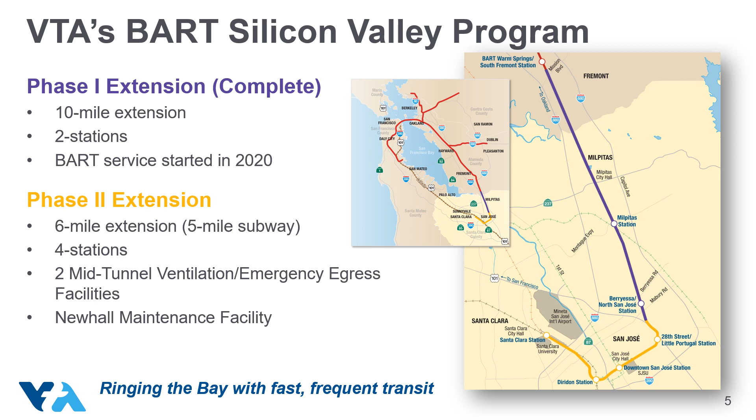The Phase 2 project provides several benefits for the region. A primary benefit is this project will connect the counties of San Francisco, San Mateo, Alameda, Contra Costa, and Santa Clara with improved, seamless, and frequent rail service around the bay. This project will also connect to many regional transit services, including VTA Light Rail and Bus, Caltrain, and other commuter and intercity rail services, including future high-speed rail.

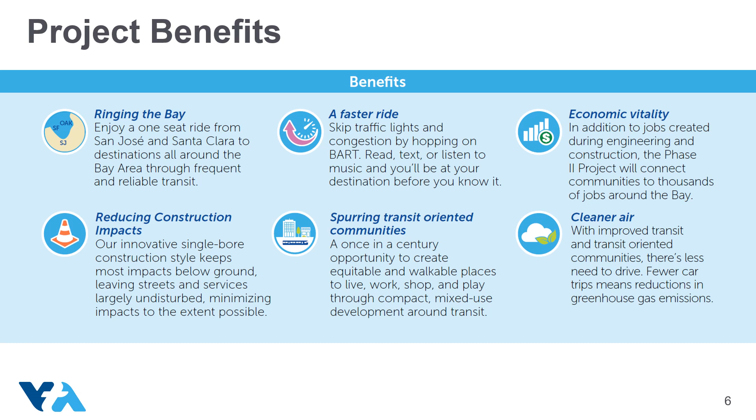We anticipate most future BART riders will access the system through transit, bicycle, or walking. By providing community members healthier and greener transportation choices, VTA's future BART stations will spur the growth of transit-oriented communities. The project will also result in cleaner air and reduced greenhouse gas emissions. All this means more economic growth that is more sustainable and will strengthen Santa Clara County's position and influence in the region for decades to come.

VTA and BART have been working closely together to get to where we are today. Santa Clara County is not part of the BART district, which is why VTA and BART have a unique relationship critical to delivering this project, and each agency's role is outlined in the comprehensive agreement. VTA covers all costs associated with the construction, operation, and maintenance of VTA's BART Silicon Valley program. It also oversees contracting and procurement for the project, including construction. Once constructed, VTA will retain ownership of all infrastructure.

BART is providing technical assistance during the planning, design, and construction of the project. This is being done through an integrated VTA and BART team called the Rail and System Organization. Once constructed, BART will operate and maintain the system. BART will also determine service frequency and operating hours.

VTA's BART Silicon Valley program began in 2000 when 70% of Santa Clara County voters approved a 30-year half-cent sales tax to fund transportation projects. The next year, VTA conducted a major investment study which determined the current BART extension alignment as the best transit project alternative. The VTA Board of Directors adopted the general alignment and station locations with the 2004 Environmental Impact Report. In 2009, the program was split into 2 projects, Phase 1 and Phase 2. Phase 1, which extended BART 10 miles from Warm Springs to Berryessa/North San Jose, advanced.

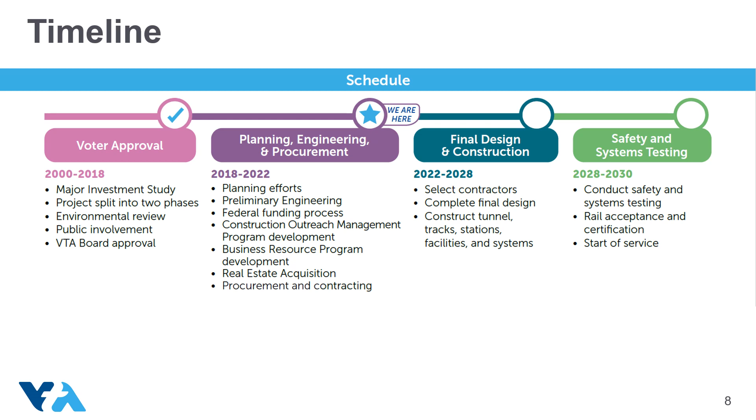VTA has a robust funding strategy that relies on significant local support, with 75% of the funding coming from local and state resources. The remaining funding would be granted by the Federal Transit Administration. VTA is pursuing a new federal grant program known as the Expedited Project Delivery Pilot Program, or EPD for short. The EPD program includes a requirement for public-private partnerships and limits federal funding to 25% of the total project cost.

VTA is the first agency to be accepted into the EPD pilot program, which will significantly shorten the process for receiving federal funding. In recent years, FTA pledged a total of $225 million towards project funding. VTA received a letter of intent for a full funding grant agreement, or FFGA, from the FTA on October 25, 2021. This action from FTA allows VTA to proceed with construction contracts, real estate acquisitions, final design and engineering, utility relocation, and other non-construction activities, such as procurement of commodities and other specialized equipment.

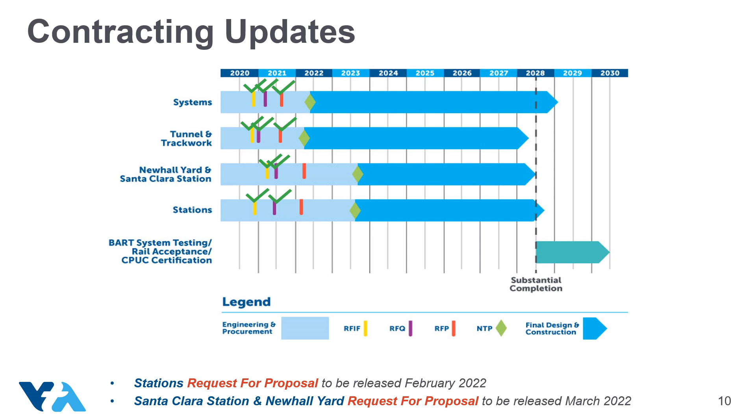The design and construction of the project will be delivered in 4 contracting packages: systems, tunnel and track work, Newhall Yard and Santa Clara Station, and the underground stations. All 4 contracting packages are going through engineering and procurement processes. Requests for proposals, RFPs, are underway for each of the contract packages. Contract Package 2, Tunnel and Track Work, is the largest of the 4 and first to be advanced. The RFP for the tunnel contract was released in September. Also, VTA recently released the draft RFP for Contract Package 1, Systems, earlier this year. We anticipate the remaining 2 contract package RFPs to be released in March and February of next year.

VTA's BART Silicon Valley Phase 2 project alignment extends south from the Berryessa North San Jose station and goes underground before crossing under US 101 and continuing west under Santa Clara Street. From there, the tunnel continues through downtown San Jose past Diridon Station and then turns north to align with the existing railroad corridor. The tunnel will surface just north of I-880, adjacent to Newhall Maintenance Facility. Tracks will continue at ground level until Brokaw Road in Santa Clara.

As previously mentioned, there are 4 stations: 28th Street in Little Portugal, downtown San Jose, Diridon, and the Santa Clara Station adjacent to the current Santa Clara Caltrain Station. The first 3 stations will be underground, while the Santa Clara Station will be at street level. The extension also includes the construction of 2 mid-tunnel facilities and a maintenance facility.

The concepts you're about to see on the following slides have been developed to inform final design. These concepts will be refined and finalized by the contractor in coordination with VTA and the cities of San Jose and Santa Clara. The upcoming slides also include images of conceptual finishes, such as wall and floor materials, that are being considered for each station. These designs and finishes were selected with the help of community-based design review committees for each station.

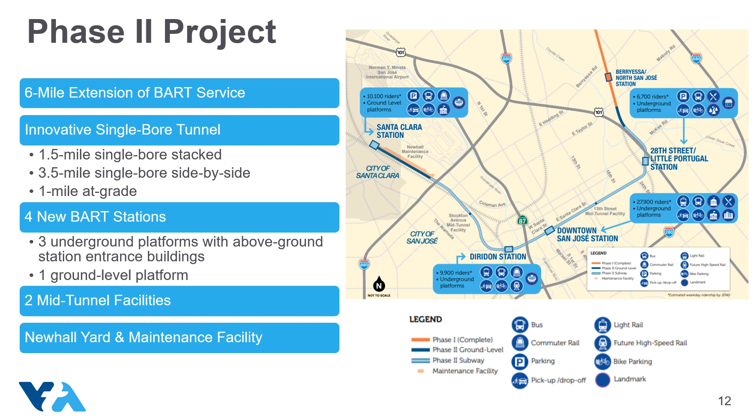Also included on the station site, but not called out by the concept, are an 800-space parking garage, a 400-space surface parking lot, and bicycle and bus facilities. The site is being designed to accommodate future potential transit-oriented development, or TOD. When TOD is developed, the 400 parking spaces in the surface lot will be incorporated into the TOD. The image on the right shows the various elements of the station from the station entrance building, item 1, down the stairs, escalators, and elevators, item 2, to the concourse, item 3, and finally the platforms below the concourse, item 4.

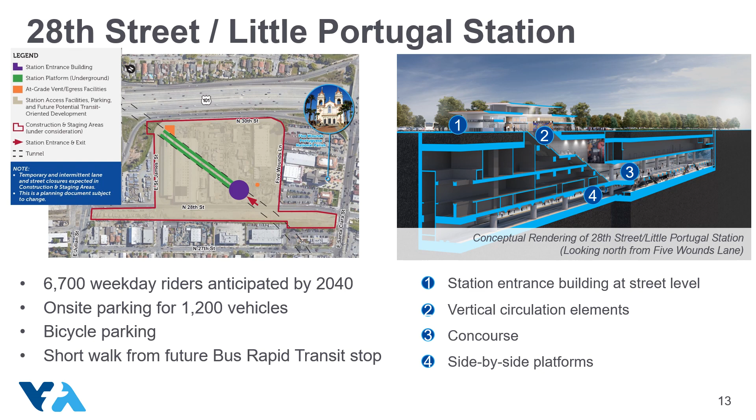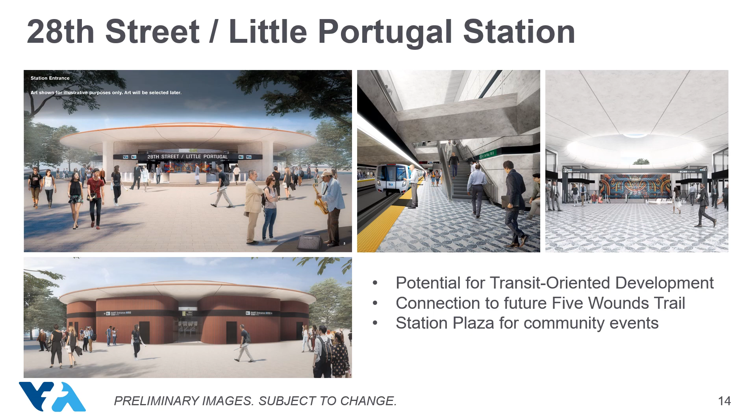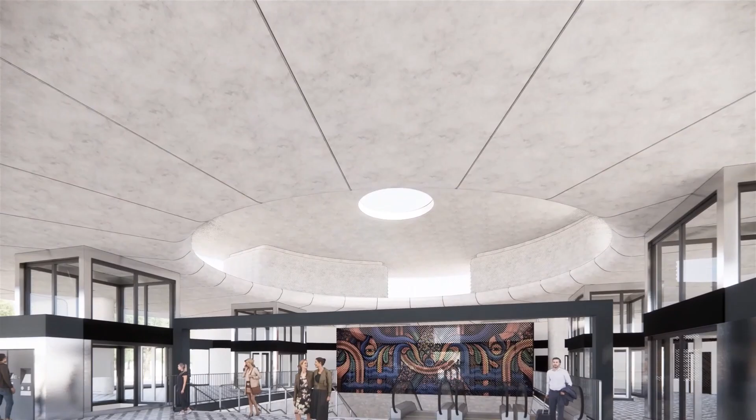This video showcases the station's current design and configuration and provides a conceptual representation of what a future rider might experience. This is the view of the station as you approach along 28th Street coming from Santa Clara Street. As you pass through the fare gates, your eyes are drawn to a circular canopy that lets light down into the lower parts of the station.

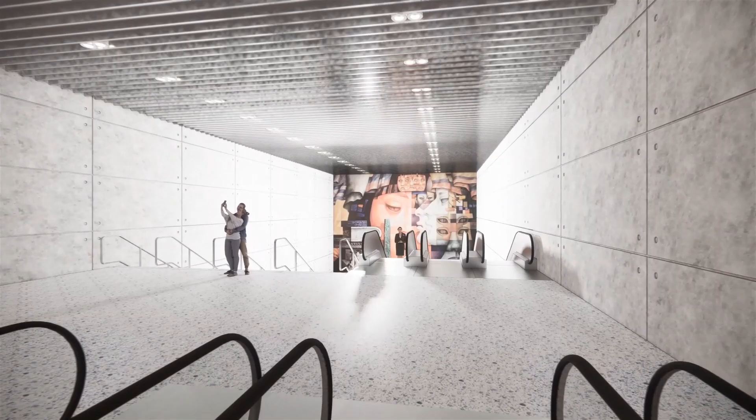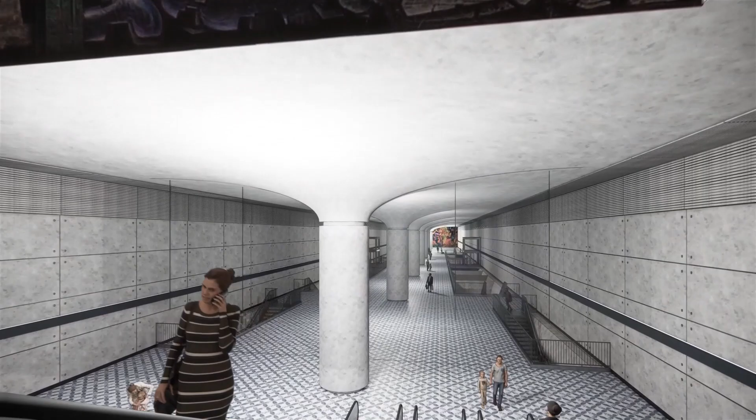Continuing down the escalators, there are opportunities for art installations in the future. Multiple locations are being considered for art installation. The escalators lead past a mezzanine and down to the concourse. From this level, you can access both the northbound and southbound platforms below.

From here, you can head west to Santa Clara in less than 10 minutes, or go north and beat the rush hour traffic and get to Oakland in approximately 65 to 70 minutes.

The next station on the alignment will be in downtown San Jose. This station will serve as the premier station in San Jose's central business district, with an anticipated ridership of nearly 30,000 passengers per day by the year 2040. The station will have two entrances along the north side of Santa Clara Street, as shown in purple on the conceptual site plan. The primary entrance will be between Market Street and First Street, where the current VTA Customer Service Center is. A second entrance will be constructed between First and Second Streets.

We have heard a desire for a future entrance on the south side of Santa Clara Street. While the south entrance is not part of this project, the project is accommodating for a future connection, which could be advanced as a separate project. Downtown San Jose Station will also include an emergency egress and ventilation structure on the corner of Santa Clara and 3rd Streets, represented in orange on the conceptual site plan.

Downtown San Jose Station's platforms, shown in green in the conceptual site plan, will be stacked one above the other. The station's internal configuration is shown in the conceptual rendering on the right. Fare gates would be provided at street level at each of the entrances. A mix of elevators, escalators, and stairs would provide access to the concourse levels. Short tunnels, also known as adits, will connect the concourse to the platforms.

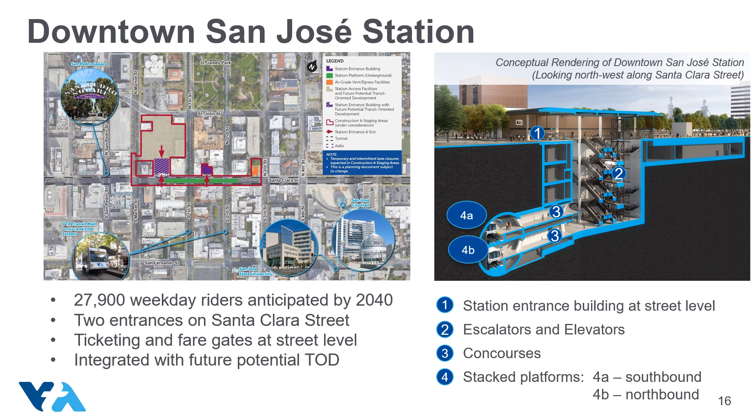VTA heard from the station's design review committee that Downtown San Jose Station should reflect the cultural and artistic diversity the area has to offer. The images on this slide showcase the aesthetic concepts that are being considered for the station. The station's exterior will likely be made of brick and may have a canopy over the entrance, an homage to the historic theaters of the area.

The station has significant opportunities for displaying public art, with murals envisioned to line the sidewalls of the primary station entrance. The station would also be integrated into future transit-oriented development on much of the block bound by Santa Clara, Market, St. John, and First Streets. VTA worked with the block's other property owners to develop a design development framework to guide a future developer, which was approved by VTA's Board of Directors in September 2021. In October 2021, the VTA Board approved the issuance of a two-step Master Developer Request for qualifications and proposals for the site.

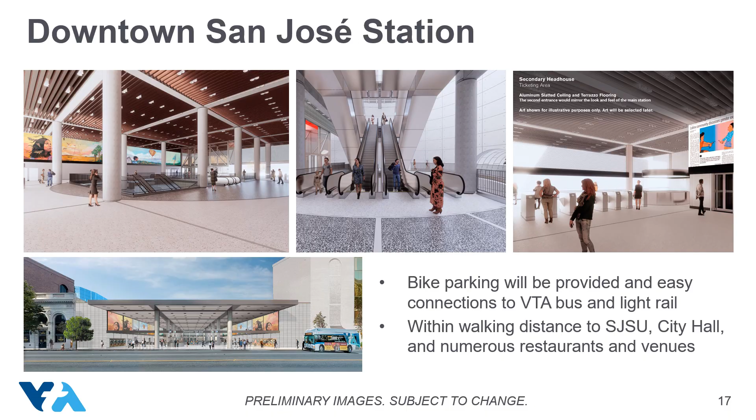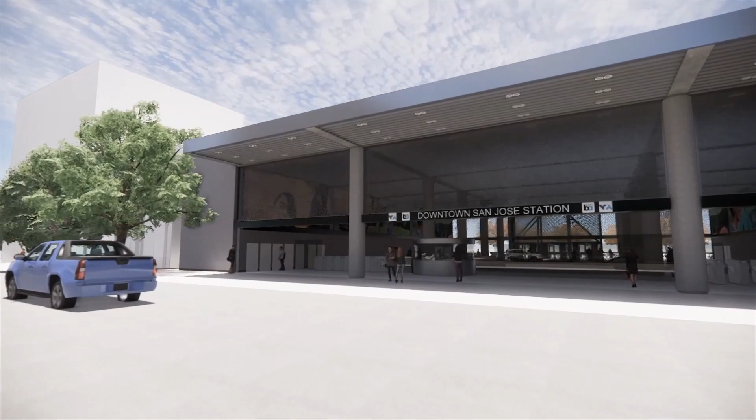On the next slide, we provided a video that offers a perspective of what you might experience when using Downtown San Jose BART Station. The video is intended as a conceptual representation of what a future rider might experience. As we approach the station's main entrance from Santa Clara, we see the station's canopy extending over the sidewalk, clearly indicating that you've reached the station entrance.

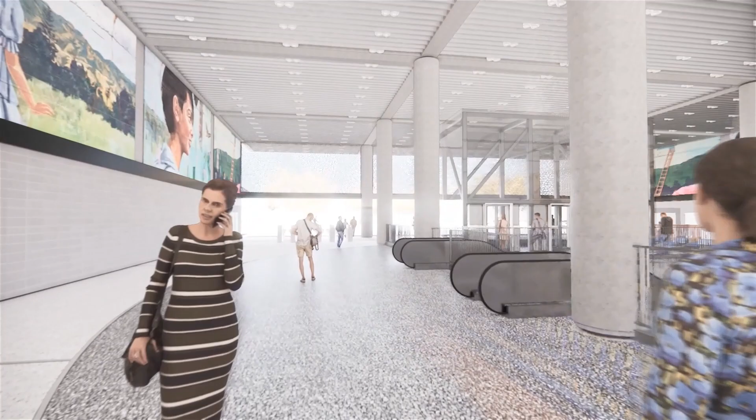Passing through the fare gates, you can see across the entire building to the entrance on the north. In the center are two sets of escalators and a bank of elevators. Let's take the escalators down. As we go down, we can see how the station's open design allows for natural light to penetrate down to the concourse level.

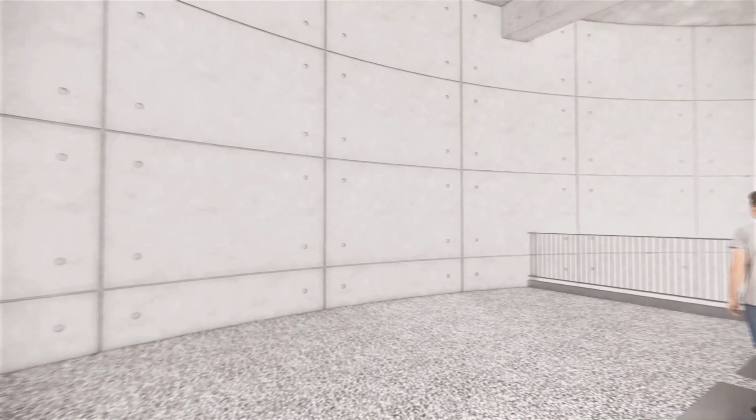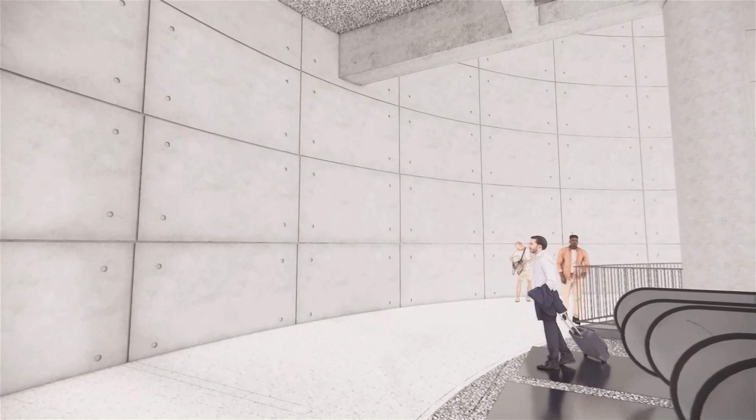The depth of the underground stations is comparable to the depth of the Central Subway Chinatown and Union Square Market Street stations in San Francisco. This first concourse level leads to the southbound train towards Santa Clara.

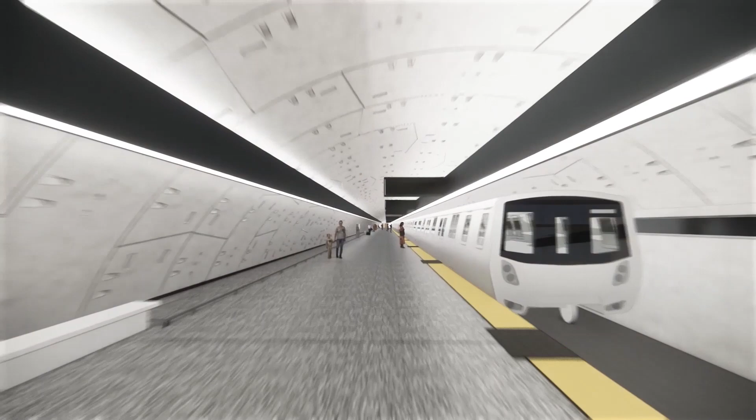As we travel down the platform, you can see the top of the tunnel. On the other end of the platform is the second station entrance. This smaller building will have high-speed elevators to bring us back to street level.

These fare gates are a 5-minute walk to City Hall and less than 10 minutes to the San Jose State University campus.

Continuing along the alignment, we next have Diridon Station, the primary intermodal hub of Santa Clara County. Diridon BART Station will be constructed on the south side of Santa Clara Street across from the SAP Center. The station's entrance will be located between Cahill and Montgomery Streets and will provide ground-level connections to VTA Light Rail, Caltrain, ACE, and Amtrak. This station is laid out similarly to the downtown San Jose Station, as shown in the conceptual rendering on the right.

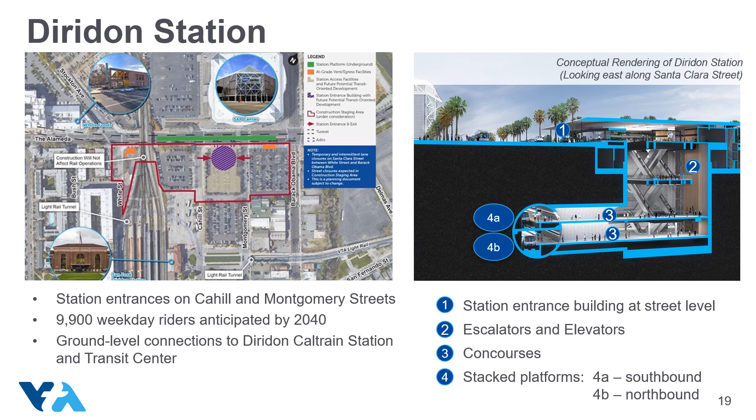Fare gates, ticketing, and bicycle facilities will be at street level. Future BART passengers would use a combination of escalators and elevators to access the concourses, and the stacked platforms will be under Santa Clara Street. The future Diridon Station is forecasted to serve nearly 10,000 daily BART riders by 2040.

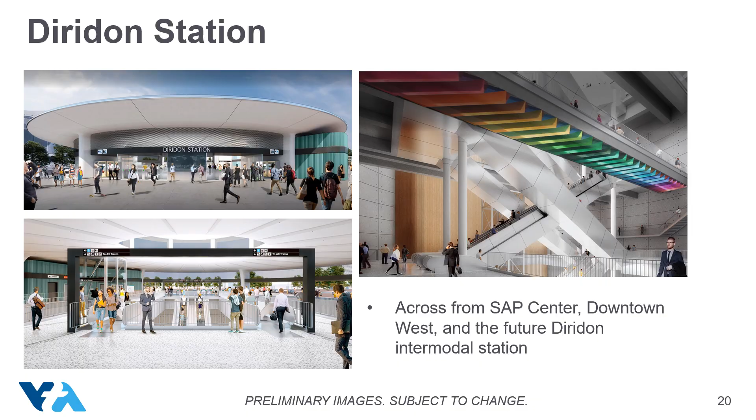The images on this slide provide representations of the aesthetic finishes being considered for this station. The station will face the SAP Center on Santa Clara Street, and entrances will be provided on both Cahill and Montgomery Streets. This open, light-filled entrance and accent colors bring a transparent and modern tech feel that is reflective of Silicon Valley. This brief video will provide a conceptual representation of what a future rider might experience.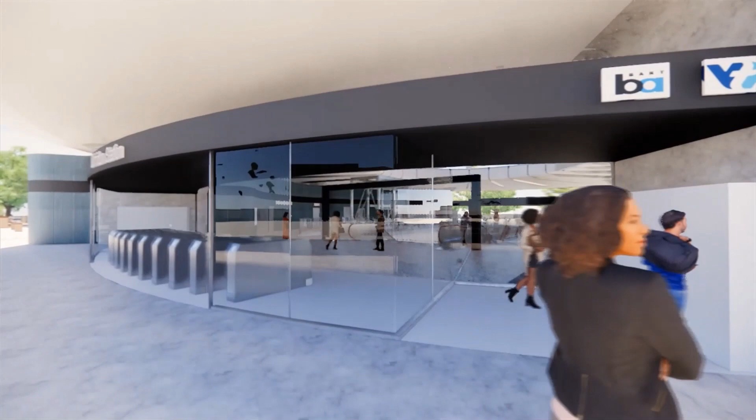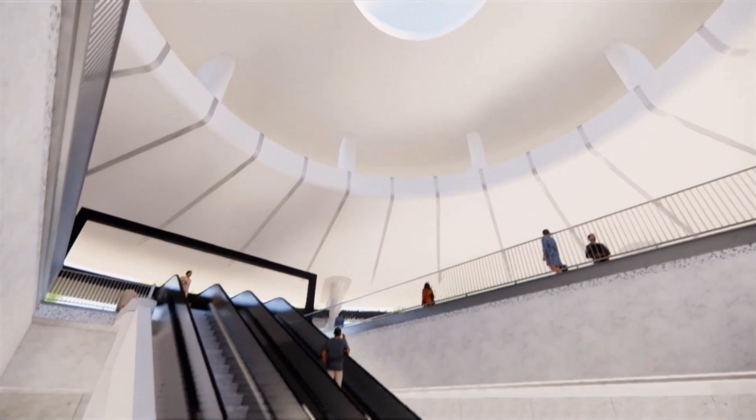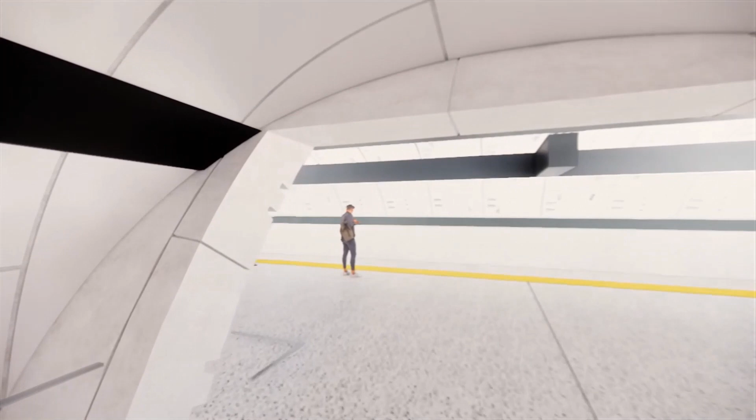Starting from across the SAP Center, we walk to the entrance on Montgomery Street. As we pass through the fare gates, you may notice similarities to the other two stations. Like downtown San Jose Station, this station offers stairs, escalators, and high-speed elevators. 2 flights of escalators will get us to the top concourse level. As we walk into the tunnel, you may notice that unlike at downtown, we are now at the center of the platform. The train from this top platform will take you to Santa Clara Station in less than 5 minutes.

The end-of-line station for the Phase 2 project is Santa Clara Station. This station will be adjacent to the Santa Clara Caltrain station to the west. The station will include vehicle parking, bicycle facilities, and a connection to Caltrain, Capitol Corridor, Altamont Corridor Express, and several VTA bus lines on the west side of the tracks via the existing pedestrian undercrossing. Unlike the other 3 stations, the Santa Clara Station concourse will be elevated and the platform will be at ground level, similar to the Warm Springs BART station. The elevated concourse would go over BART storage tracks to provide access to the ground level platforms.

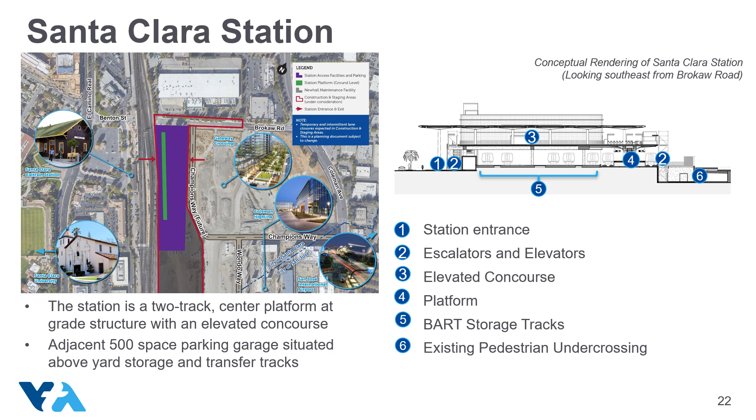On the border of Santa Clara and San Jose, BART passengers will have access to destinations in both cities within walking distance. Across the street from the station will be Gateway Crossings, a new development with a mix of housing, retail, and open space. To the southeast is PayPal Park, home to the San Jose Earthquakes, the Coleman Highline Office Park, and various restaurants and retail. To the southwest is Santa Clara University, the oldest operating university in California.

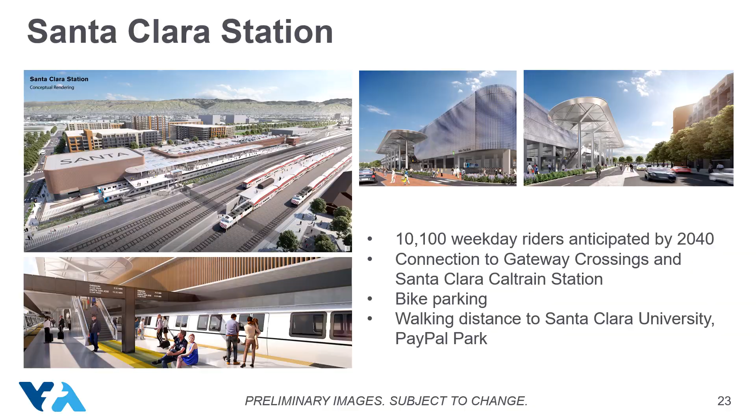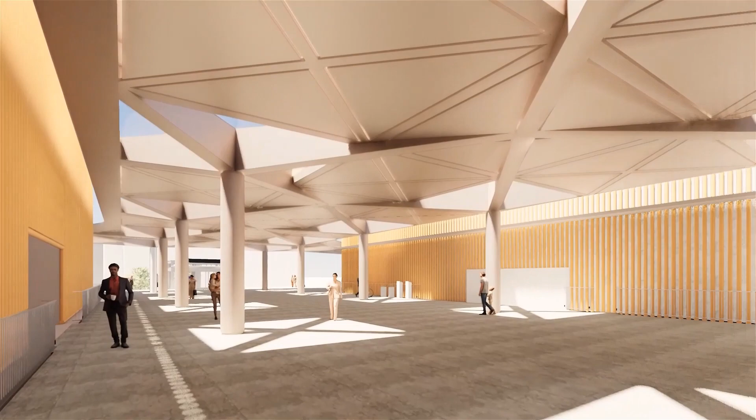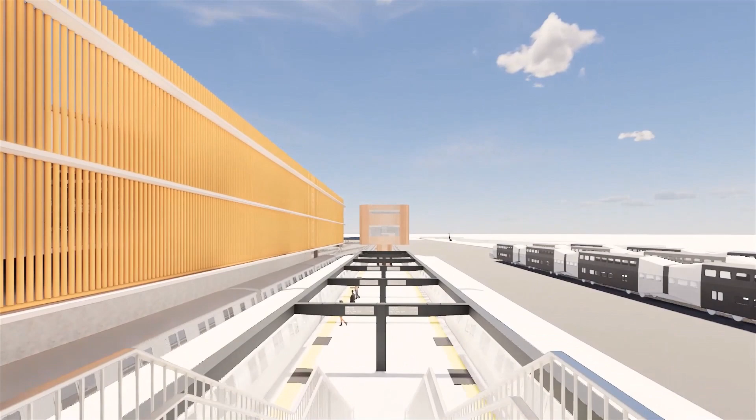This video of Santa Clara Station provides a conceptual representation of what a future rider might experience. This is the entrance to the station on Champions Way, with the parking garage on the left above BART train storage tracks. Stairs, escalators, and elevators will provide access to the elevated concourse. To continue to the BART train, you turn left and pass through the fare gates. There are a series of stairs, escalators, and elevators. This view takes us to the southern end of the concourse. From here, we can access the station's platform, which is at the same level as the Caltrain tracks and the Newhall maintenance facility. From here, BART will provide reliable service to Oakland in just over an hour.

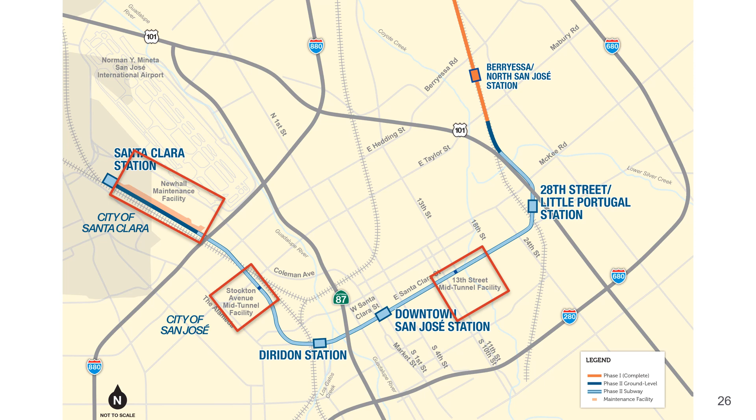In addition to the 4 new stations, the Phase 2 project will also include these additional elements: a 5-mile single-bore tunnel, 2 mid-tunnel facilities, one at 13th Street and another at Stockton Avenue, and the Newhall maintenance facility. One of the most unique elements of the Phase 2 extension is that the trains will run in a single, large-diameter tunnel that will accommodate 2 train tracks, one for each direction.

Thanks to the large 43-foot diameter of the tunnel, we can construct many of our station's facilities within the tunnel itself. This means construction can largely take place off the street, reducing the need to close Santa Clara Street in comparison to more common twin-bore and open-cut tunnel construction methods. Single-bore tunnels have been used for highways and multiple other types of projects in the United States. The project will be the first time that a single-bore tunnel is used for a transit system in the U.S.

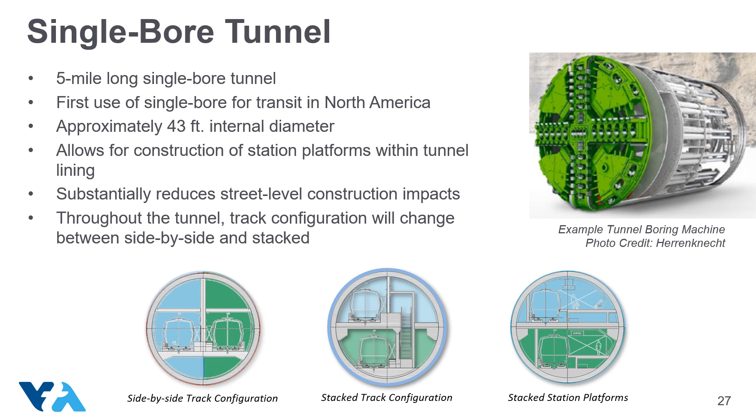There will be 2 mid-tunnel facilities, one on Santa Clara Street at 13th Street, and the second on Stockton Avenue at Schiele Avenue. The mid-tunnel facilities are primarily for emergency exit and to provide ventilation in the tunnel. The mid-tunnel facilities will be fully enclosed and will blend in with the surrounding urban environment.

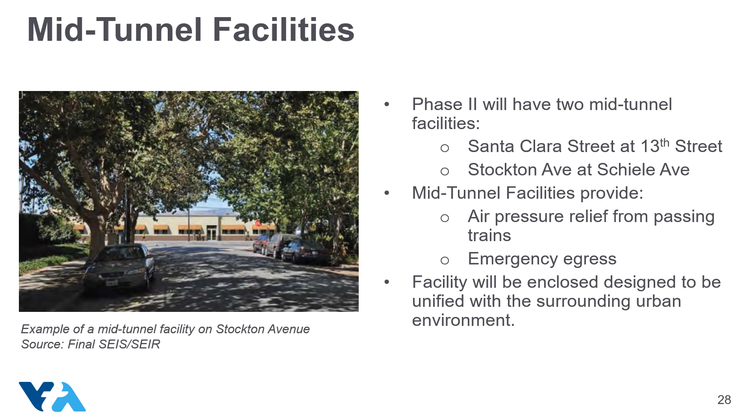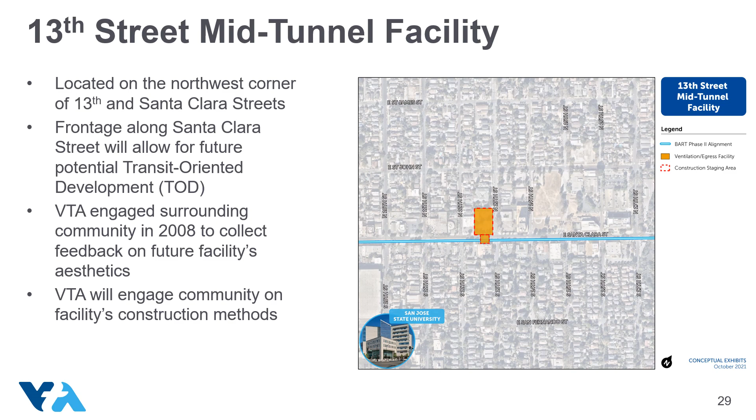The 13th Street Mid-Tunnel facility will be on the northwest corner of 13th and Santa Clara Streets. The facility will face Santa Clara Street and provides an opportunity for future potential transit-oriented development. In 2008, VTA engaged the surrounding community to collect feedback on the facility's aesthetics. VTA will be further engaging the surrounding community as the project progresses.

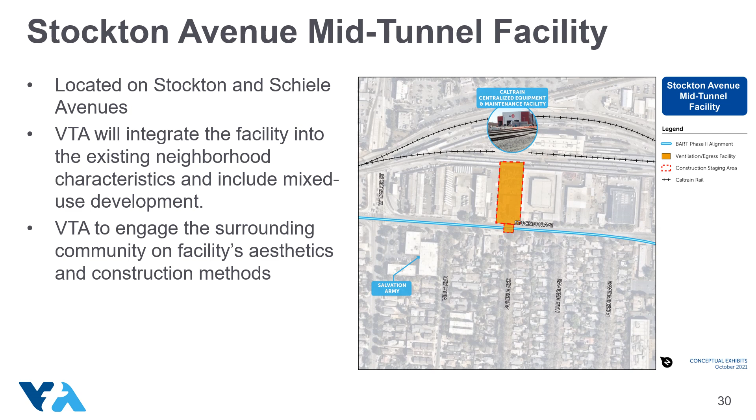The Stockton Avenue Mid-Tunnel facility will be on Stockton Avenue at the intersection of Schiele Avenue. The facility will be incorporated into the existing neighborhood characteristics. VTA will be engaging the surrounding community on the facility's aesthetics and construction methods as the project progresses.

Mid-tunnel facility construction will likely include a cut and cover construction method. This involves relocating utilities in the street, excavating the top portion of soil underneath the roadway, installing temporary decking for traffic to resume, constructing the underground facilities, backfilling soil over the top of the construction, and restoring the ground surface.

Currently, engineering plans include limited cut and cover construction. It is estimated that 75 to 150 feet of street surface may be impacted along Santa Clara Street and Stockton Avenue for construction of the mid-tunnel facilities. This is subject to change as the project advances. The contractor will limit construction impacts to the greatest extent possible, as specified in the contractual requirements. VTA will engage the community on construction methods prior to the start of construction.

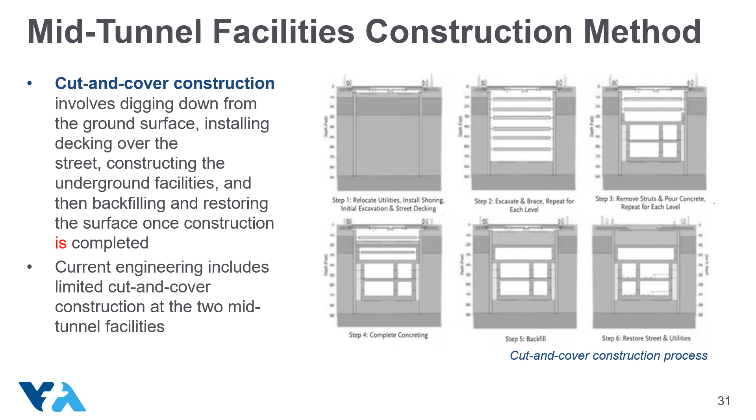Here are examples of cut and cover construction from LA Metro's subway expansion in Los Angeles. As you can see, temporary roadway decking was placed while crews continued excavating and building the structure underneath. This limits the amount of time detours are required.

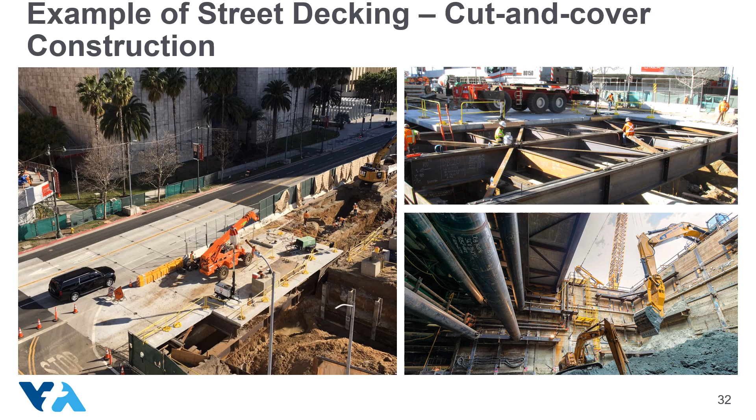The Newhall maintenance facility will be constructed to accommodate the new service provided by the Phase 2 project. This facility will be located immediately northeast of the Caltrain Railroad corridor on the former Union Pacific Newhall yard that VTA purchased in 2004. The roughly 40-acre facility will include storage for BART cars. Some of the additional key elements of the Newhall maintenance facility could include various maintenance shops, a train car wash building, and various train control, power, and communications facilities.

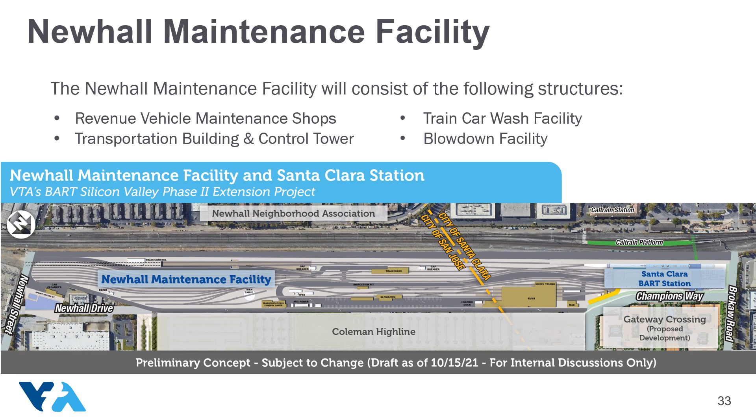Now that you have heard about the physical elements of the Phase 2 extension, we'd like to share how we will be delivering and constructing the project. VTA is delivering its BART Silicon Valley Phase 2 project in 4 contract packages, also known as CPs. CP1 is systems, and it focuses on system-wide train control and rail communication systems.

As the largest valued contract, CP2, tunnel and track work, includes the procurement of a very large 48-foot diameter tunnel boring machine, excavation of the tunnel and 3 underground stations, and track work in the tunnel, portals, and 2 mid-tunnel facilities. CP3 is specific to Newhall Yard and Santa Clara Station. CP3 includes the maintenance yard and facility, storage tracks, ground level Santa Clara Station, and parking garage.

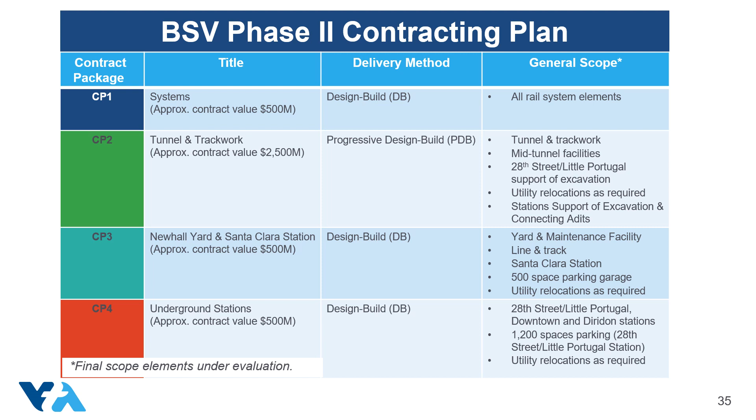Finally, CP4 covers stations and includes 28th Street, Little Portugal, downtown, and Diridon stations. The contract package also covers mechanical, electrical, and plumbing of the 3 underground stations. CP1 and CP2 are set to begin in mid-2022 and go until early 2028 and 2029, while CP3 and CP4 are both set to start in late 2023 and go through mid-2028. Revenue service is scheduled to begin in 2030.

Progressive Design Build is the project delivery method for CP2. The process is similar to Design Build, but contracts are made with the Design Build contractor at an even earlier stage in the project's development, utilizing about 10% design definition, and contractor selection is mainly based on qualifications. Due to the contract size and complexity, a high level of collaboration and input from VTA, BART, and the Progressive Design Build contractor is required throughout the design and construction process. This helps to avoid creating a design that is expensive and/or challenging to build.

This process also creates a transparent and iterative open book cost evaluation estimate, maximizing innovation and limiting project risk. Since Progressive Design Build helps identify and mitigate issues early, CP2 will benefit from this project delivery method as it allocates risks appropriately and welcomes an open and collaborative environment between VTA, BART, and the contractor.

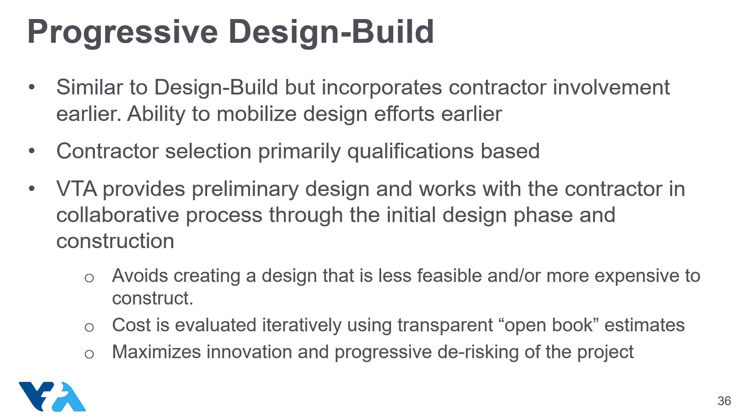The project's Progressive Design Build process will include two main stages. Stage 1 will include collaboration between the Progressive Design Build contractor, VTA, BART, the City of San Jose, and the community. It is in this phase that pre-construction design will advance from 10% to 90%. The bulk of pre-construction activities and some limited preparatory early work will also be included in this process.

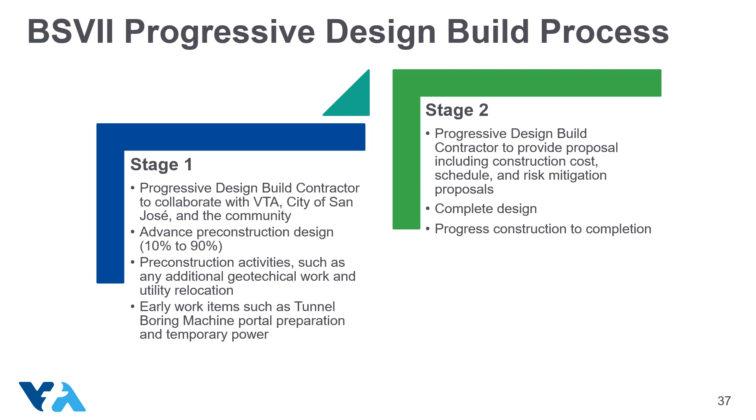This will also include starting the procurement of the tunnel boring machine, which will be specifically manufactured for the project and take over a year. During Stage 2, the Progressive Design Build contractor will provide a proposal that includes construction cost, schedule, and risk mitigations. Stage 2 will follow the construction process through to the completed design.

The project delivery method for CPs 1, 3, and 4 is Design Build. This means that architectural, design, and construction services for each fall under a single contract and have a single point of management, with the design beginning with a 30% package prepared by the owner, and the remaining design is left to the builder in accordance with owner-defined criteria and standards.

Design Build allows for a simplified procurement process and better integration of the design and construction phases. This also means the design and construction teams are formed prior to the proposal phase. The cost of Design Build is competitive, but the main driver is faster project delivery, since construction can proceed in parallel with design. Design Build can provide significant time savings.

According to a 2018 study by the Construction Industry Institute, Design Build projects had a 102% faster delivery speed than the more traditional design bid build. Cost is also known when the contract is awarded. After selection, the design build contractor uses their skills and expertise to complete design and build the project. VTA's role is to oversee their work.

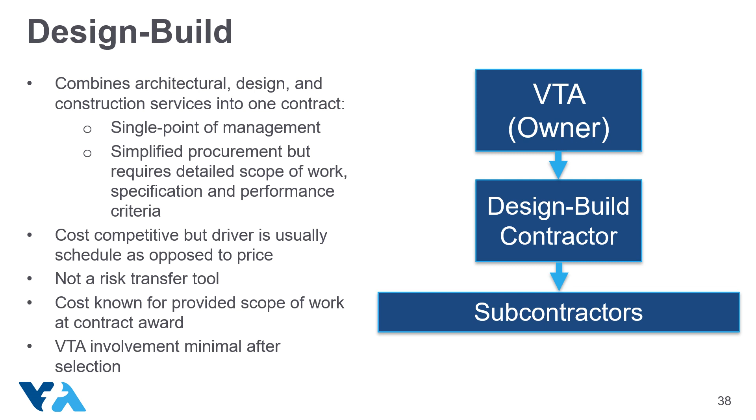Early construction activities, sometimes referred to as enabling works, include activities that must be conducted for project construction to advance. These activities would be conducted by the CP2 contractor as part of the track and tunnel package. 3 teams have been pre-qualified to propose on Contract Package 2 by the end of 2021. The selected contractor will start performing early construction activities in 2022, while simultaneously advancing the tunnel's design. These early construction activities will be conducted at several sites along the future alignment.

Types of work may include utility relocations, building remediation and demolition, soil sampling, preliminary excavation, production and storage of tunnel lining segments, tunnel boring machine fabrication, and survey and instrumentation installation. It is important to note that this is a preliminary list of work that is subject to change, depending on feedback from the contractor team. A more defined schedule of work will be available after the contract is awarded.

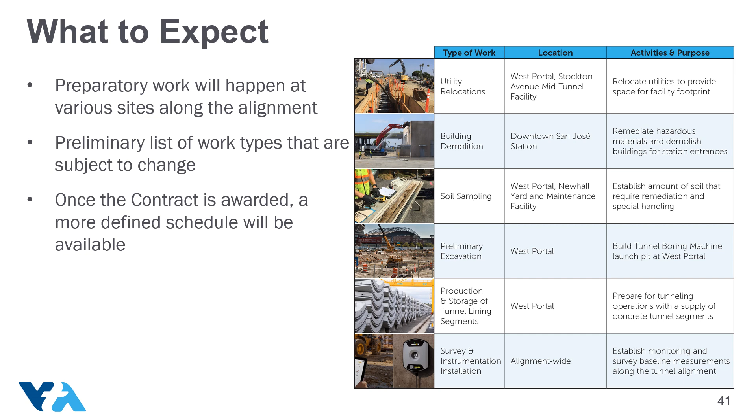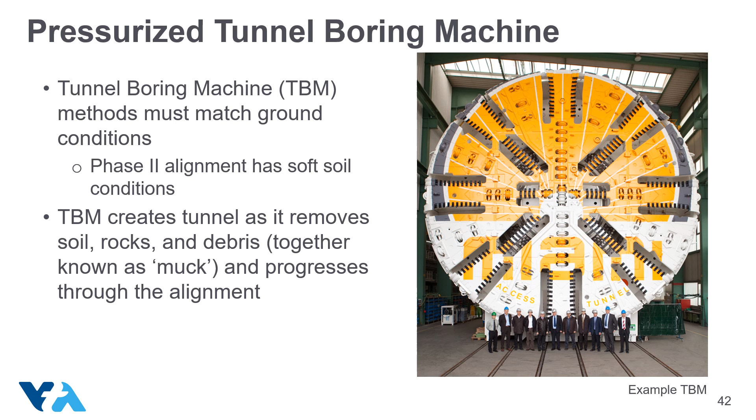VTA's TBM will have an exterior diameter of approximately 48 feet and will be custom built by TBM manufacturers. The TBM will be built and tested at a factory, then disassembled into pieces small enough for shipping. The components will arrive on site and need to be reassembled and tested prior to launching. Crews will use heavy-duty cranes and purpose-built cradles to weld and bolt the machine back together.

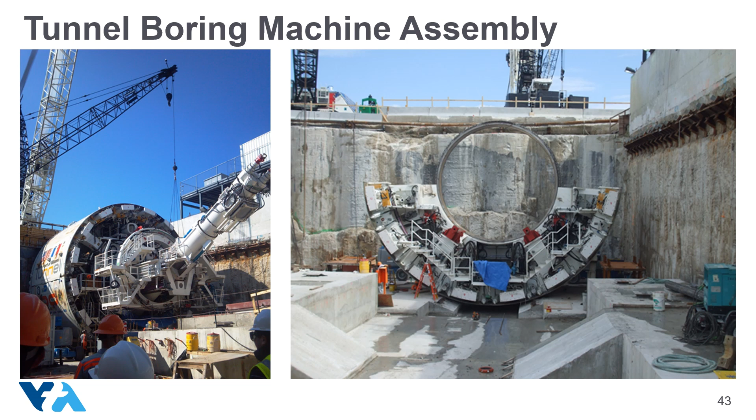The TBM will most likely be launched at the west portal and finish at the east portal. The west portal is behind PayPal Park, and the east portal is near the current end of the Phase 1 extension by the Berryessa North San José BART Station.

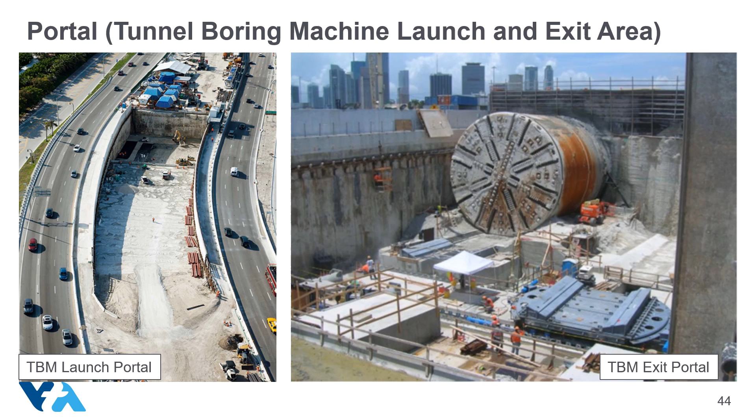A TBM jacking frame, which is the triangular gray steel and struts that are shown in this photo, will be built at the west portal to give the TBM something strong to push from. This will be used to get the TBM launched. Once the TBM advances a couple hundred feet, it will be dismantled and the TBM will use the precast concrete tunnel segments to continue boring the tunnel.

The TBM will construct the tunnel using precast segments that will be stored at Newhall Yard and transported into the tunnel boring machine. The TBM will then place and seal the segments in place to create the tunnel.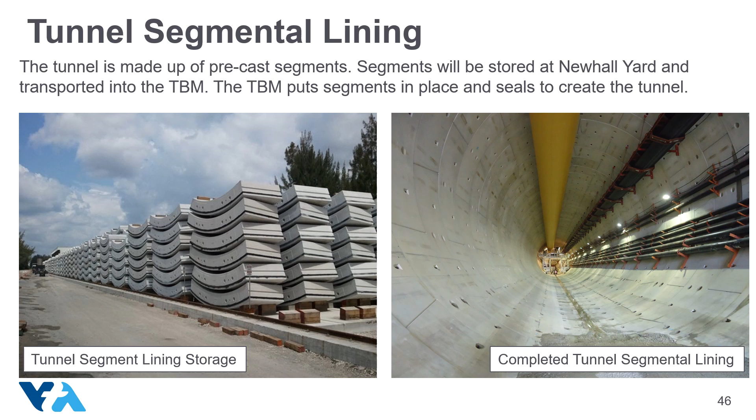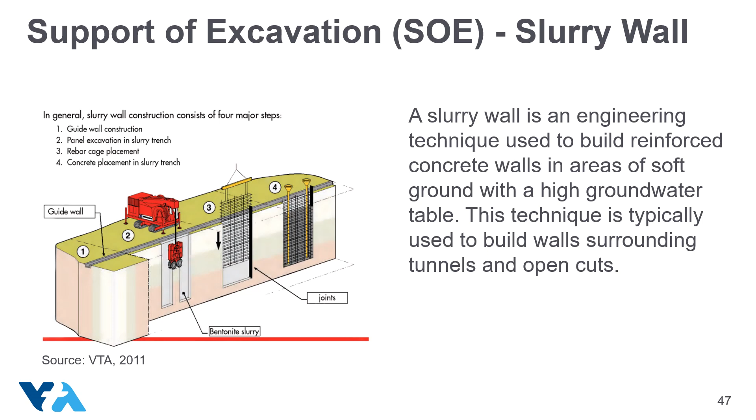Slurry walls will be used extensively on the project for supporting deep excavations. They provide support of excavation, also known as SOE, and keep groundwater out of the construction sites. Typically, slurry walls are 3 to 4 feet wide and over 150 feet deep around the perimeter of each site. They are made up of concrete and rebar and supported by steel struts. These will be installed at both portals, mid-tunnel facilities, and at all underground stations and ancillary structures.

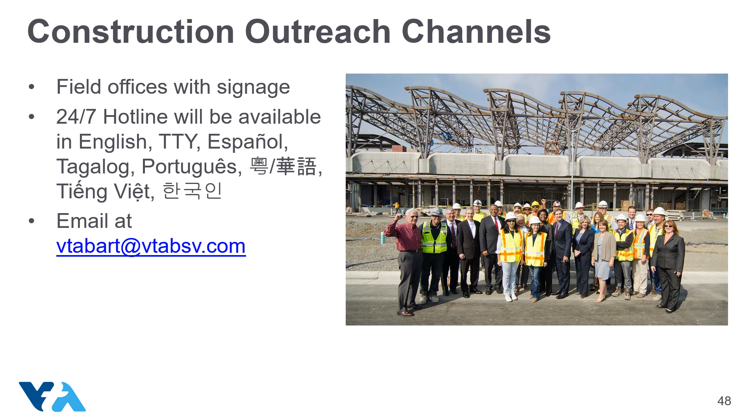During construction, information will be available through field office postings and a 24/7 hotline that will be accessible in English, Spanish, Vietnamese, Chinese, Tagalog, Portuguese, and Korean. Further information and inquiries can also be found by reaching out to VTA BART at VTABSV.com.

VTA has developed and will implement the Construction Outreach Management Program to meet its environmental commitments. The purpose of the COMP is to minimize and reduce construction-related transportation impacts on the community and inform the public and other stakeholders of the construction schedule and associated activities.

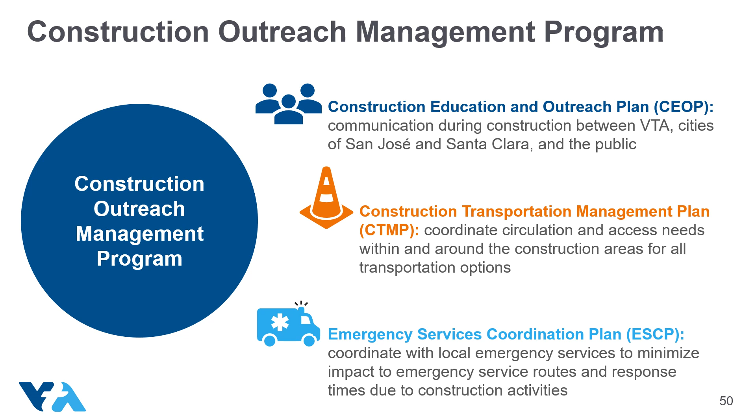The COMP includes 3 plans: the Construction, Education, and Outreach Plan, the Construction Transportation Management Plan, and the Emergency Services Coordination Plan. The purpose of the Construction, Education, and Outreach Plan, or the CEOP for short, is to guide engagement with local businesses and community organizations along the project alignment, as well as to understand how to minimize and reduce construction impacts. There are 5 key elements to the CEOP: general outreach, stakeholder engagement, business resources, placemaking, and on the radar.

General outreach is being conducted with broader audiences and communities along the Phase 2 alignment to deliver the next 6 miles of VTA's BART Silicon Valley program. This is being done through mailers, flyer drops, public meetings, a 24/7 hotline, tabling events, field offices, both traditional and social media, construction notices and coordination, webinars, and other outreach tools to keep people informed.

Stakeholder engagement efforts are focused on identifying stakeholders most impacted by the project and nurturing those relationships. We are doing this through the many great partnerships we have with our community working group members, leveraging their vast networks to bring people to the table. We have also done door-to-door intake, tours, and presentations at other groups' meetings like neighborhood and business associations.

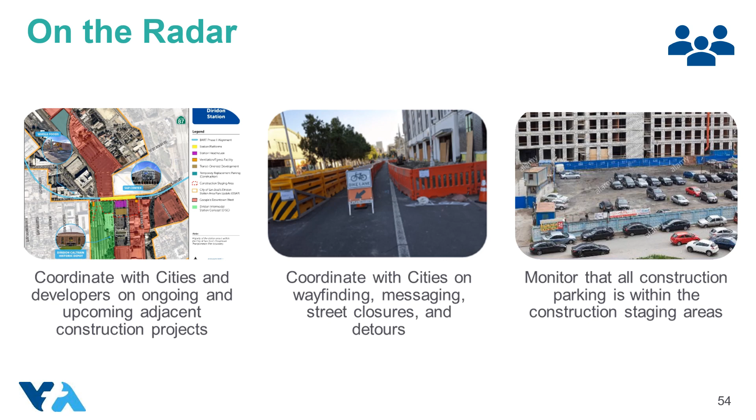VTA is committed to supporting and sustaining small businesses' economic health during construction. We are incorporating best practices and lessons learned from other federally funded mega projects around the country, such as those in Los Angeles, California, St. Paul, Minnesota, and Mesa, Arizona. VTA has organized a small business task force made up of businesses and business resource providers in the project's vicinity. This group informed VTA's Small Business Resource Study and the Business Resource Program, which is currently under development.

VTA aims to enhance awareness and access during construction while helping to keep the area active and providing exposure to impacted businesses and increase positive public sentiment. This is done through organized events, pop-up events, public art, space activation, and wayfinding signage to make sure people can connect with these exciting experiences and have a presence in the area.

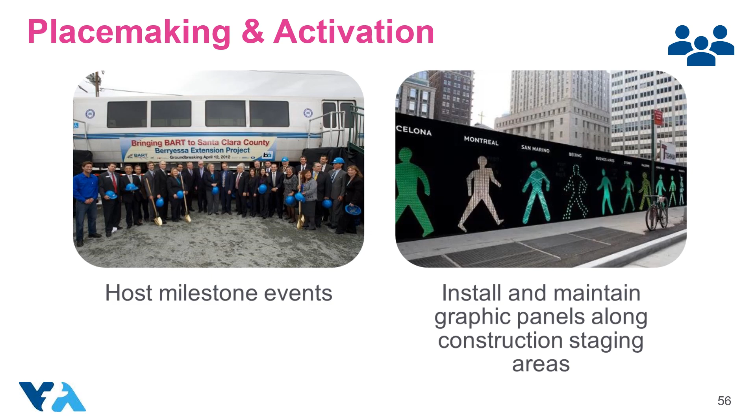The Construction Transportation Management Plan, also known as the CTMP, was developed to prepare for upcoming construction activities. The plan identifies access and service needs that have been identified through a series of stakeholder interviews and surveys. The Emergency Services Coordination Plan identifies requirements and processes to help minimize construction-related impacts along emergency service routes. The plan was created through close coordination with fire and police representatives and will be included with each contract-specific CTMP.

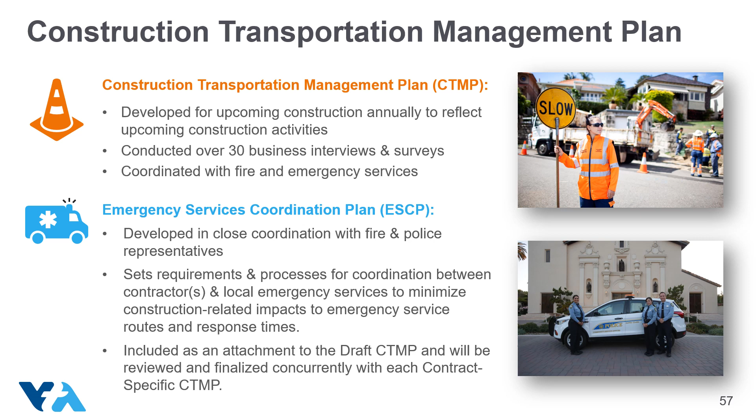In addition to the CEOP, VTA also gathers input through various meetings, working groups, committees, and one-on-one briefings. VTA convenes quarterly community working groups that are open to the public. If interested, we encourage you to attend. We are also happy to present at any existing community or neighborhood meetings.

In the past month, we engaged the community to gather feedback on the look and feel of the station aesthetics. Opportunities for comments and feedback were provided through an interactive online platform as well as at various tabling events that were held near each of the 4 station areas. Through this online and in-person engagement, we've received feedback from more than 2,500 people.

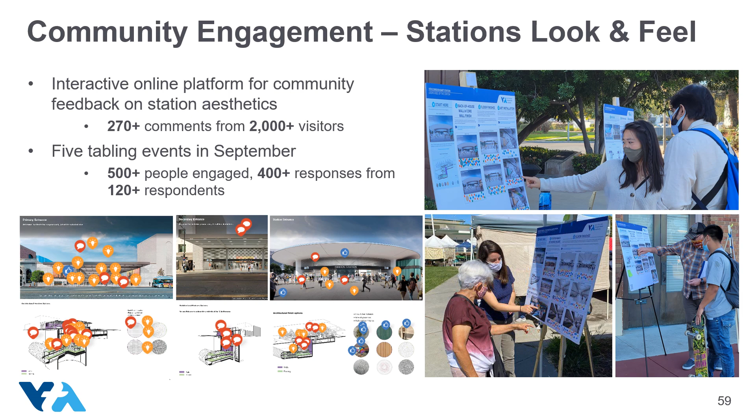There are many opportunities to learn more about the project. My VTA will be launching and providing SMS alerts on project milestones and updates. As always, further information is also available on our website, fact sheets, our social media accounts, and at community meetings. As mentioned earlier, we also would love to share more information through tailored group presentations.